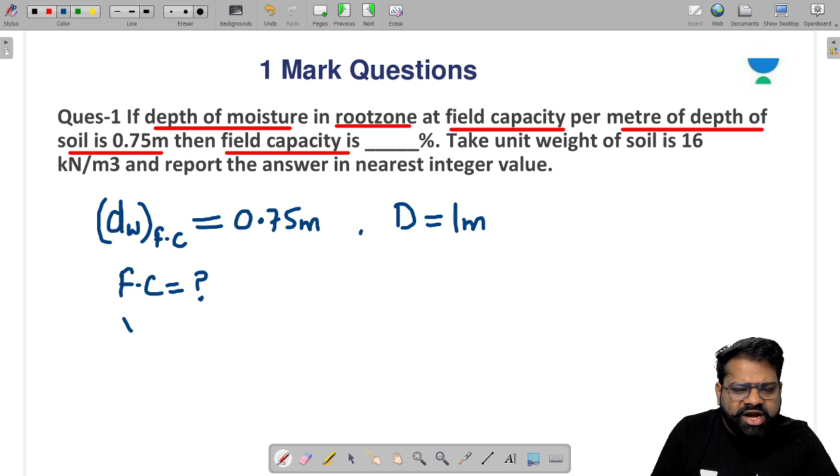If the unit weight of the soil, the dry unit weight of soil, is 16 kilonewton per meter cube, and you have to report the answer in the nearest integer value.

As we already know, the depth of water up to any point, either up to field capacity, permanent wilting point, or optimum moisture content, can be calculated by a simple formula. If we calculate the water available in the root zone up to field capacity, the formula will be gamma D divided by gamma W, multiplied by depth of root zone, and multiplied by the field capacity, since we want to find water up to field capacity.

You are given gamma D equal to 16 kilonewton per meter cube, depth of root zone is 1 meter, depth of water up to field capacity is 0.75 meter. For unit weight of water, since it is not given, you take 9.81 kilonewton per meter cube. All the values are given; only you need to find the field capacity.

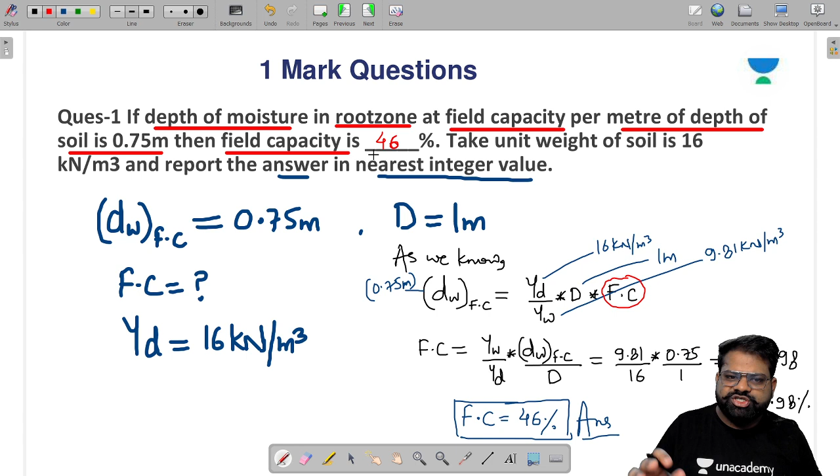Moving forward to the next question. This question is all about irrigation water. What does the question say, just read it. The question says...

The concentration of sodium, magnesium, and calcium in the irrigation water are 25, 2, and 3 milliequivalent per liter respectively. These concentrations are given in the question. If the electrical conductivity of the water is 300 micromho per centimeter at 25 degrees Celsius, then the irrigation water is classified as...

There are two things given: the first is the calcium, magnesium, sodium concentration, and the second is electrical conductivity. First, we classify the water based on sodium, magnesium, and calcium into low sodium water, high sodium water, or medium sodium water. To determine whether the water is high sodium, low sodium, or very high sodium, we calculate the sodium adsorption ratio.

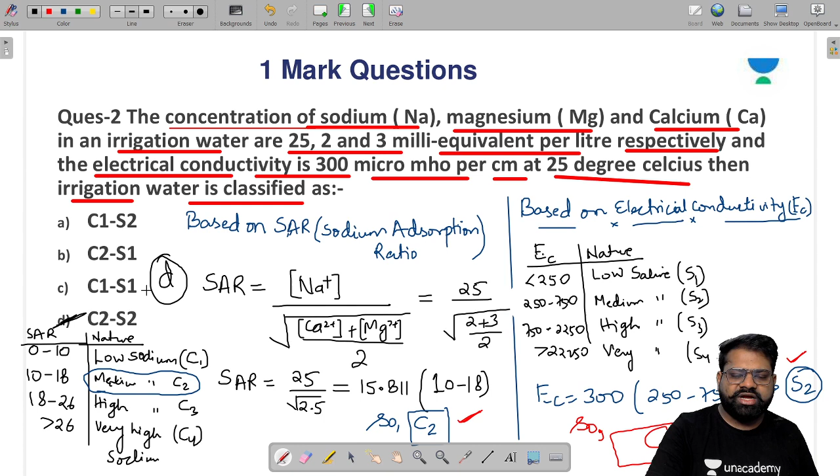Okay, this is the third question. Just read it and try to understand this question. It's an important question. You can solve it easily, but there are many students who can't solve it. After solving this question, you will get an idea that this type of question can also come in the GATE examination for 1 mark. So moving forward to this question, let's read it. What is this question trying to say?

Read it. The wetted area and wetted perimeter of a channel section are given. Wetted area is given as 6.25 meter square and wetted perimeter is 2.5 meter. If the average velocity of the water flowing is 1 meter per second, then find the mean size of the sediment carried by the channel.

He is asking about the mean size, meaning he is asking about D50. D50 is called mean size. You need to find it. As we know, when we study irrigation, the mean size can only come when we calculate the silt factor, that is F. This mean size can only be obtained when we calculate the silt factor F.

But this silt factor can only come into account when we are studying Lacey theory. It means that in this question, in order to find the mean size, you need to find the silt factor, and in order to find the silt factor, you need to use Lacey theory. You need to know how to use Lacey theory.

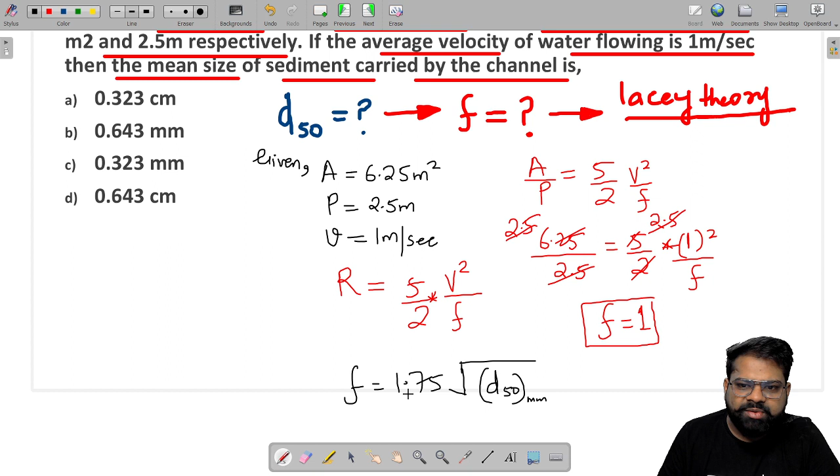Silt factor is equal to 1, and as we know that the silt factor is equal to 1.75 under root of mean size in mm. f is given as 1.

So here the mean size in mm is equal to 1 upon 1.75 ka whole square. When you solve this, the value comes out to be 0.323 mm. So option C is correct, because the mean size is given as 0.323 mm, which comes out to be 0.32 mm.

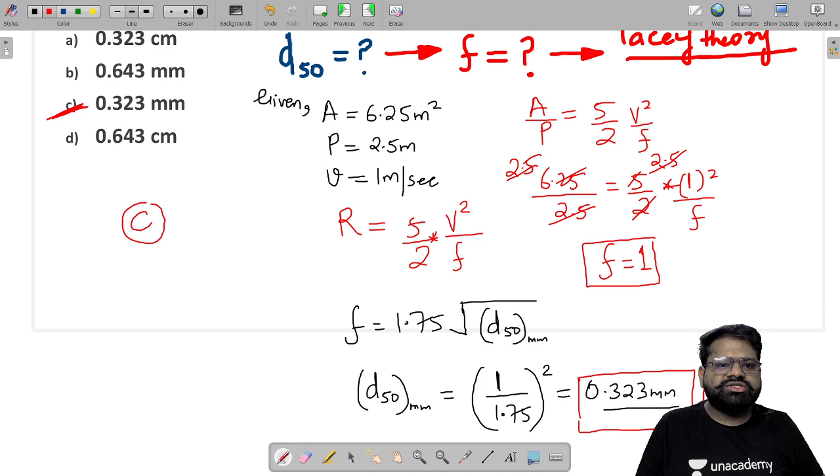The correct answer of this question would be C. I hope you understand. So these are the number of questions which we have discussed for the 1 mark.

Now we discuss what type of questions can come for 2 marks in irrigation engineering. This is the fourth question, which can come for 2 marks. Just read this question, my dear students.

Just read this question, my dear students. What he is trying to say, just try to understand what this question tries to say.

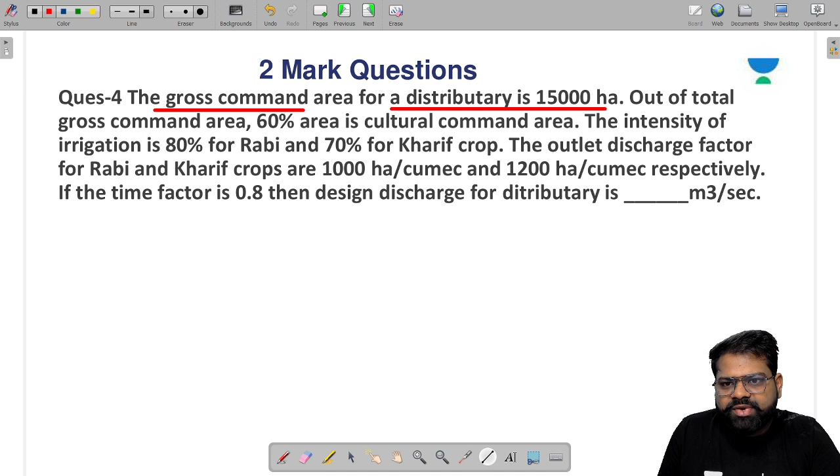So the gross command area for the distributary is 15,000 hectares. Out of total gross command area, only 60% area is cultivable command area. Means that out of 15,000 area, only 60% area is that area on which irrigation can be done.

That the land can be irrigated, but the intensity of irrigation is 80% for the Rabi season and 70% for Kharif season. Out of 60% of cultural command area, only 80% is used for irrigation in the Rabi season and 70% is used for irrigation in the Kharif season.

If the outlet discharge factor, what is the outlet discharge factor? It means the duty at the outlet point for the Rabi and Kharif crops are this and this respectively, and if the time factor is this, then the design discharge for the distributory is? How do you solve it? Just write it.

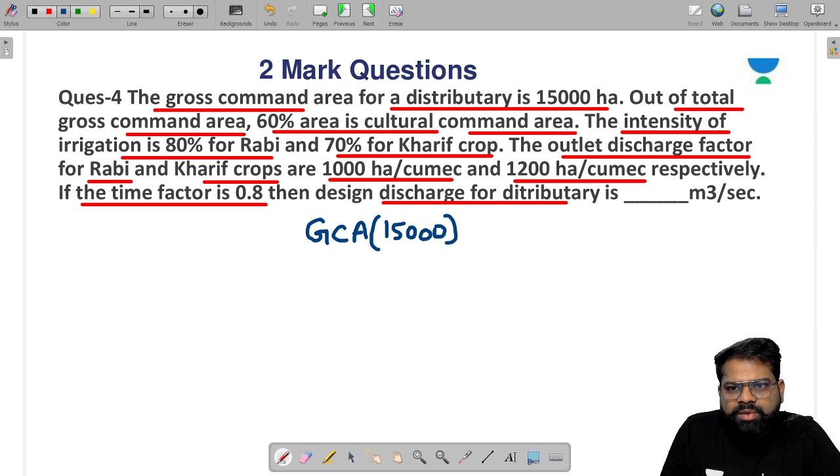As it is given, the gross command area is equal to 15,000 hectares. Out of these 15,000, if I talk about...

The cultural command area is only 60% of GCA, that is equal to 9,000 hectares. Out of these 9,000, what he is trying to say is only 80%...

is irrigated in the Rabi season. If I talk about the area irrigated in Rabi season, then 80% of CCA, that is 0.8 into 9,000, 8 9 is 72, that is equal to...

7,200 hectares. And the area which is irrigated in the Kharif season is equal to 70% of 9,000, 7 9 is 63, that is equal to 6,300 hectares.

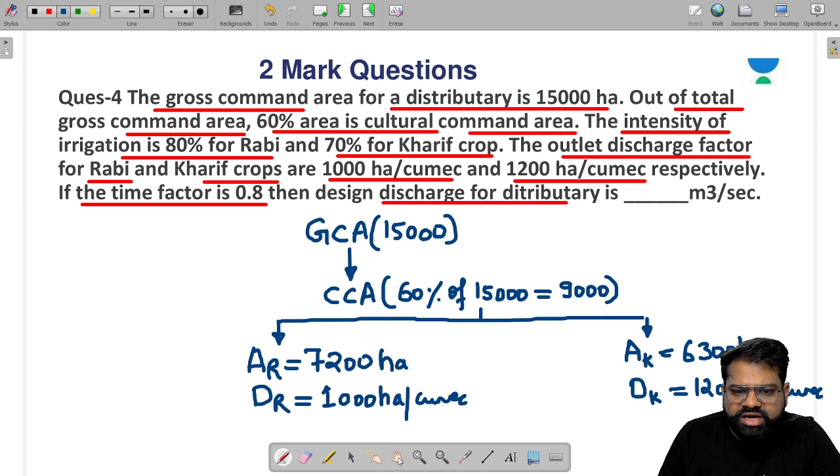If the duty of Rabi season is equal to 1,000 hectare per cumec, and if the duty of Kharif season is equal to 1,200 hectare per cumec, then he is trying to ask what is the design discharge capacity of the distributary.

So if I talk about the design discharge of the Rabi season, how do you calculate it? That would be equal to A divided by D, area which is irrigated in Rabi season, divided by duty of the Rabi season. But this will only be obtained when, for the whole irrigation period, the canal is running.

But the time factor is 0.8, it means that you have to divide with the time factor, you have to determine it with the time factor.

Similarly, you calculate the design discharge for Kharif season. So for Kharif season, the design discharge will be equal to area irrigated in Kharif season divided by duty of the Kharif season, multiplied by 1 upon time factor.

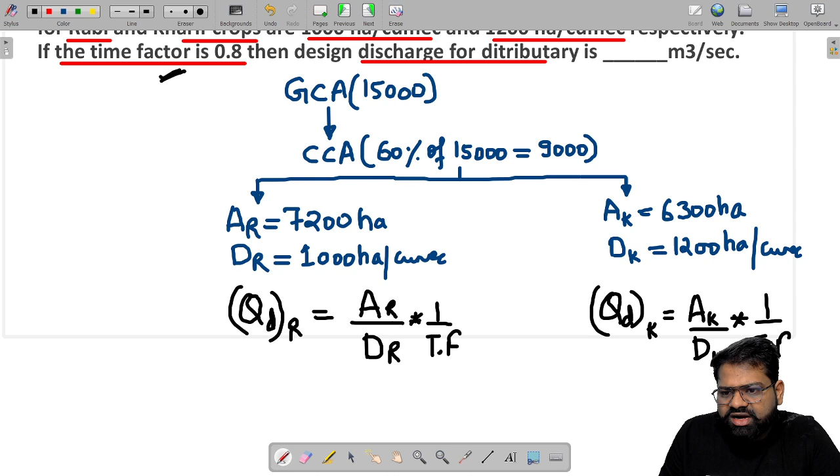Moving forward, design discharge for the Rabi season would be equal to area 7,200 divided by duty 1,000, divided by time factor 0.8. On solving this, the design discharge required for the Rabi season comes out to be 9 cubic meters per second.

And similarly, the design discharge required for the Kharif season would be equal to 6,300 hectare divided by 1,200 hectare per cumec, multiplied by 1 upon 0.8. On solving this, the design discharge for the Kharif season would come out to be... just solve it and tell me the answer.

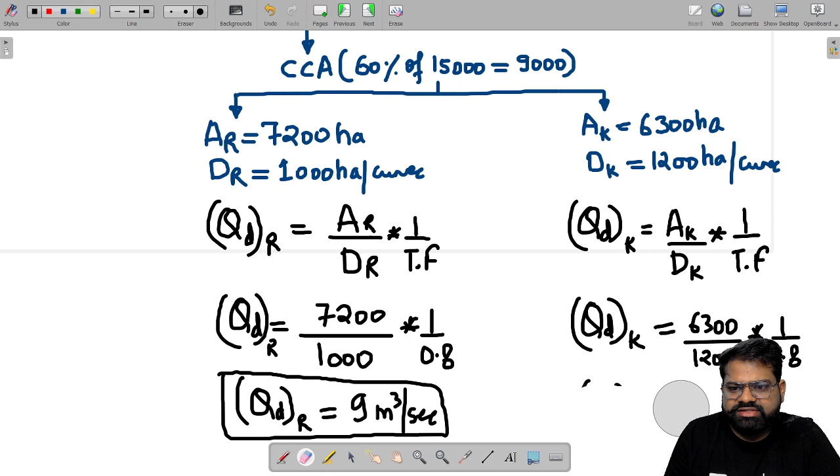Just solve it, my dear students. 6,300 divided by 1,200 and divided by 0.80, and it comes out to be 6.5625. So the design discharge for the Kharif season is coming out to be 6.5625 meter cube per second.

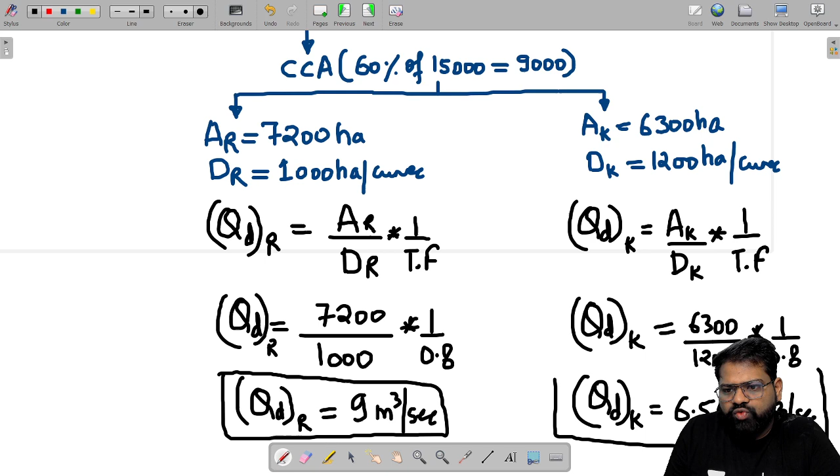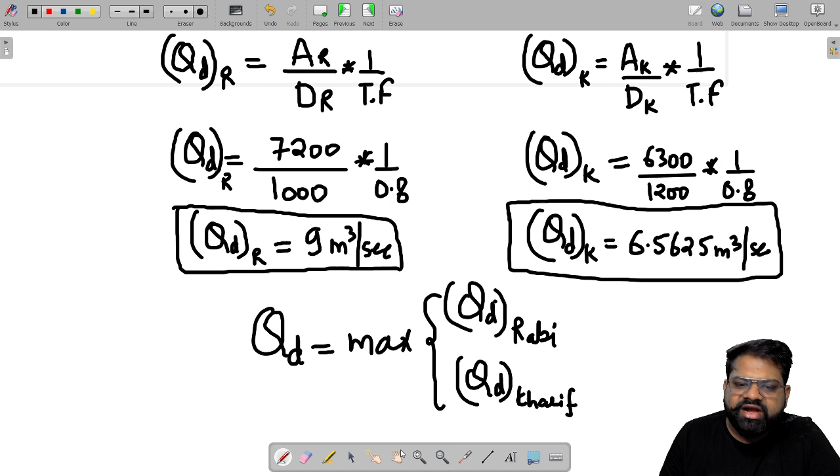Now, Kharif season and Rabi season are different seasons, not the same. The crops are grown at different times. So for the design discharge, we take the maximum of the design discharge required in the Rabi season or the Kharif season. This approach is used when the crops are of different seasons; if they were of the same season, we would add them up. But since they are different, we calculate using the maximum theory, and it comes out to be 9 meter cube per second.

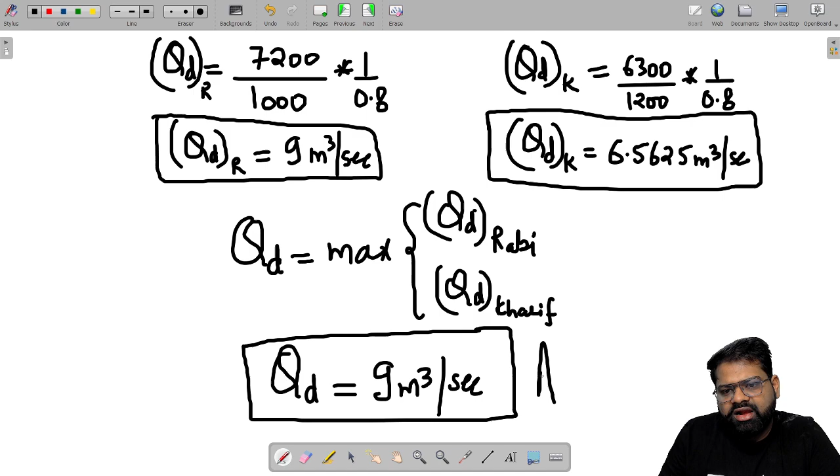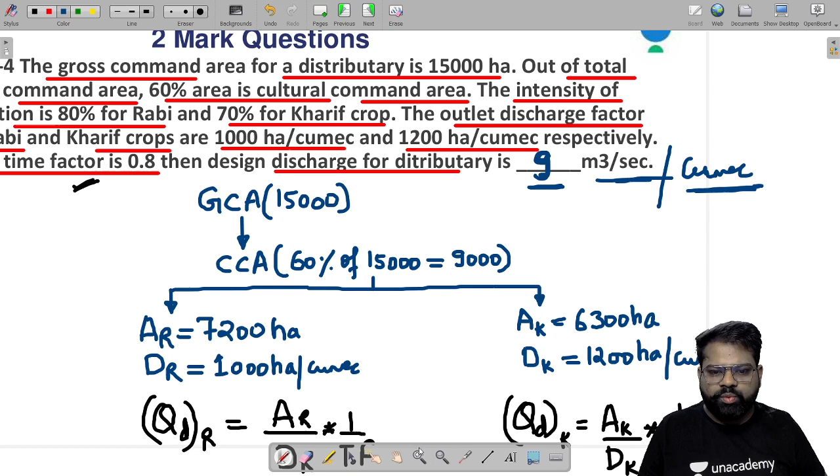So the design discharge of the distributary or the canal comes out to be 9 meter cube per second. Since this is a numerical answer type question, you have to substitute the value 9 here, because the answer is calculated in meter cube per second, and 1 meter cube per second is also called 1 cumec. I hope you understand this concept and this question in a very nice way.

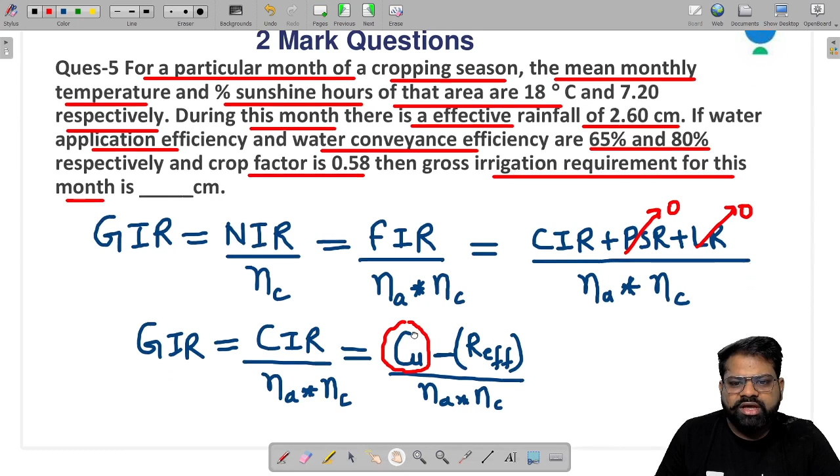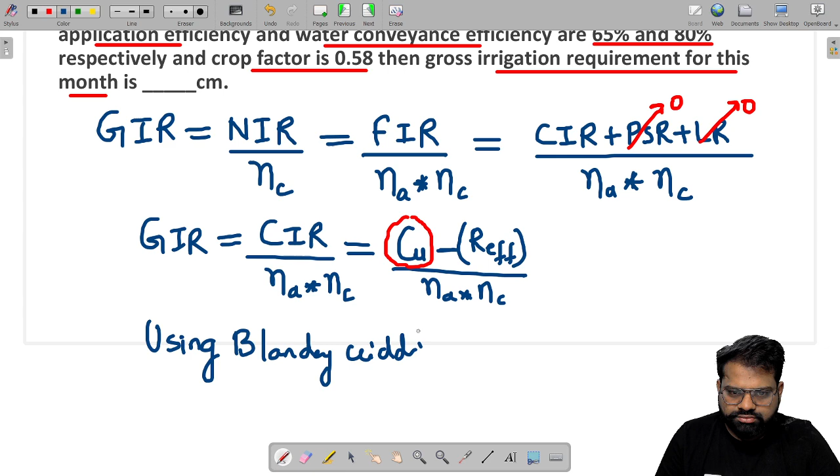Since percentage sunshine hours are given, on the basis of percentage sunshine hours, using the Blaney-Criddle equation, you can find the consumptive use as: consumptive use equals 2.54 times K multiplied by P (percentage sunshine hours) multiplied by TF, divided by 100.

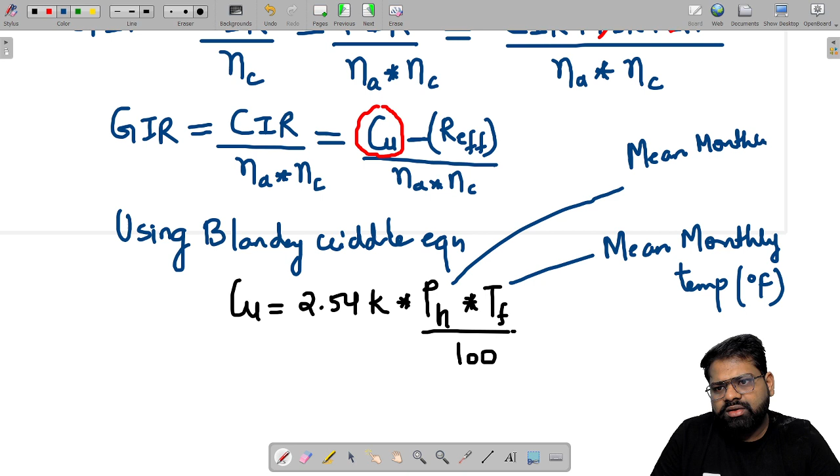What do you mean by TF? TF is the mean monthly temperature. If you have studied this formula, TF is the mean monthly temperature in degree Fahrenheit - you have to write the temperature in degree Fahrenheit. What is P? P is called the mean monthly percentage of sunshine hours.

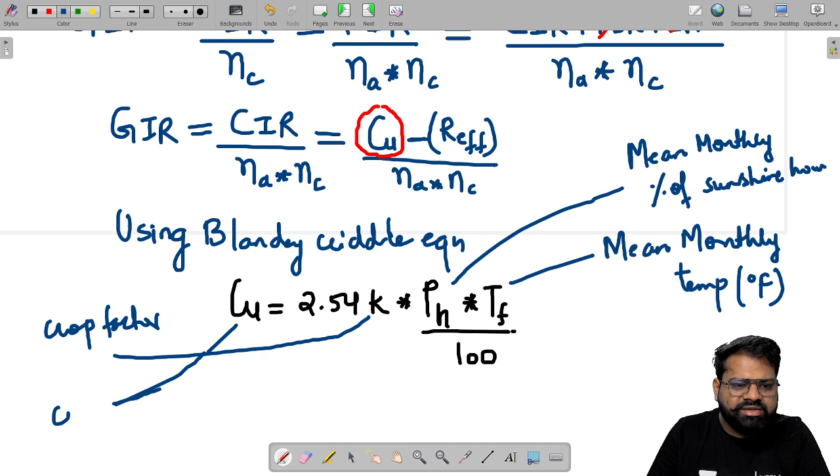The amount of sun which gives the sunshine in the whole year, what is the percentage in that month in which the crop is sown? So mean monthly percentage of sunshine hours. K is called as crop factor. Based upon this data, CU can be calculated. CU is called as consumptive use, and its value will come out to be in centimeters.

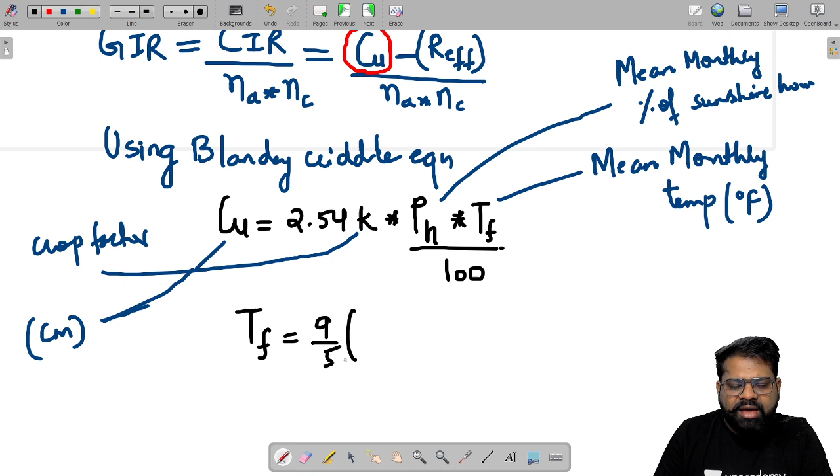If we want to find the value of TF, then TF is equal to 9 by 5 times temperature in degree Celsius. The temperature in degree Celsius is given as 18 degrees Celsius plus 32. When you solve this, the mean monthly temperature in degree Fahrenheit comes out to be 64.4 degree Fahrenheit.

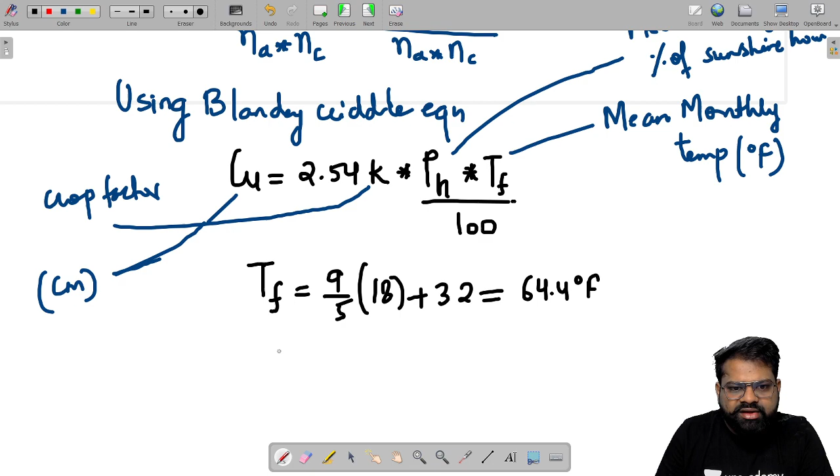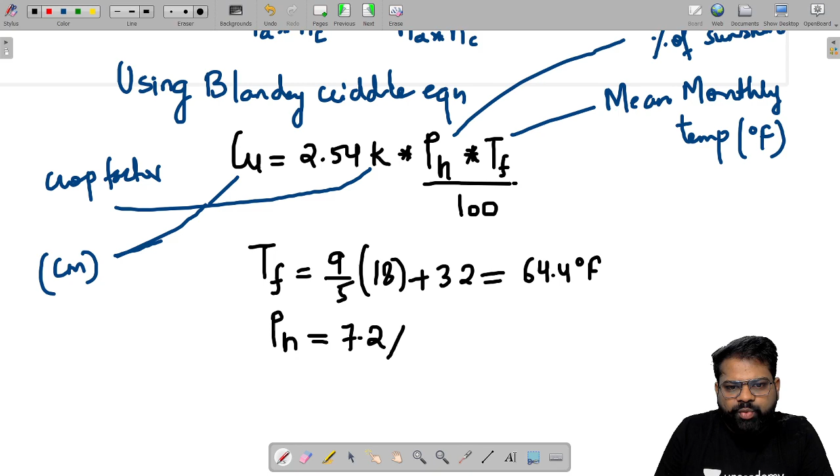Mean monthly percentage of sunshine hours is given as 7.2%. The crop factor is given as 0.58.

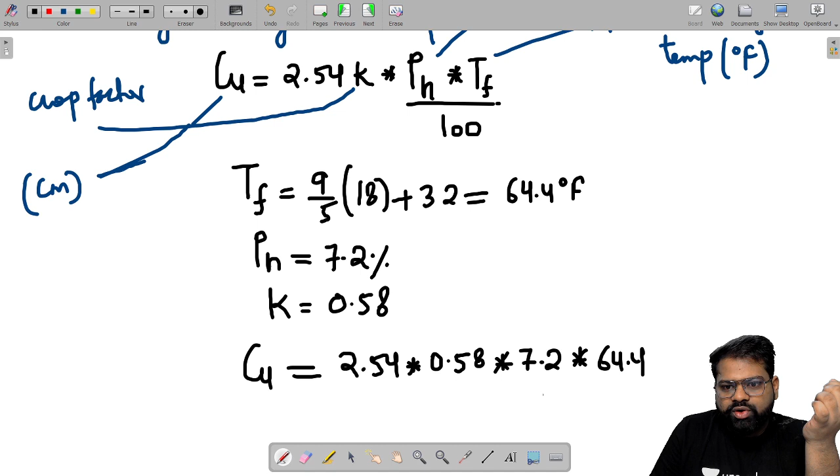Substituting this value in the above equation, the consumptive use is equal to 2.54 multiplied by crop factor 0.58 multiplied by mean monthly percentage of sunshine hours 7.2 multiplied by TF 64.4, divided by 100. On solving this, the consumptive use comes out to be 6.83 centimeter.

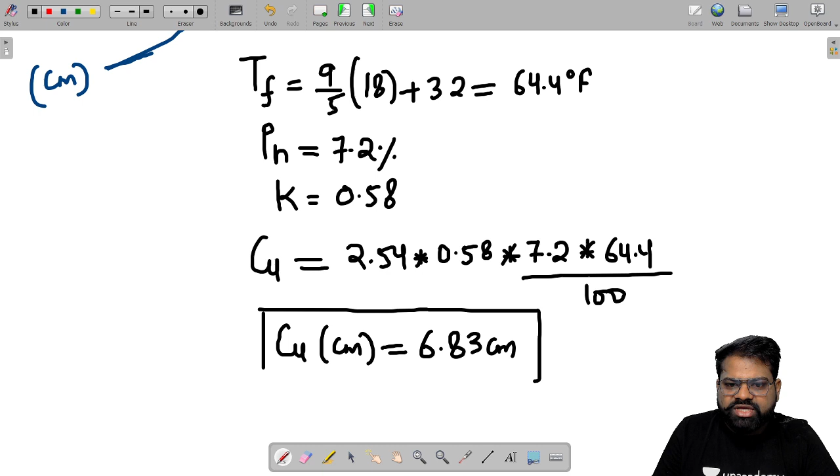If we calculate the consumptive irrigation requirement, CIR will be equal to consumptive use minus effective rainfall, which is given as 2.6. The consumptive irrigation requirement comes out to be 4.23 centimeters.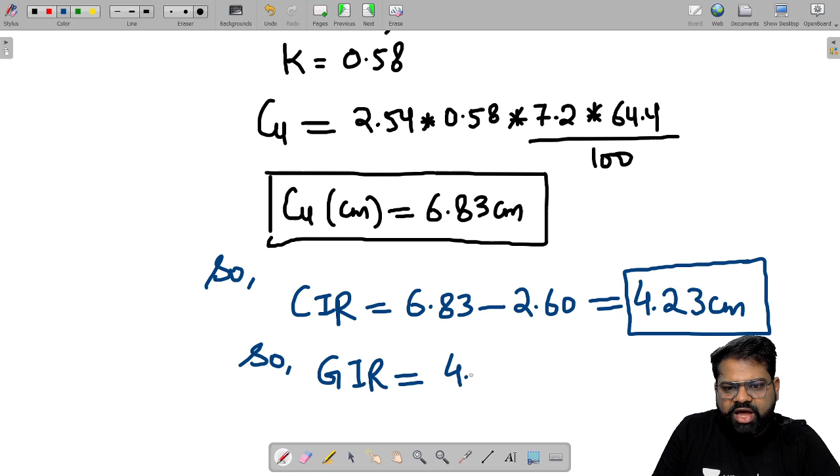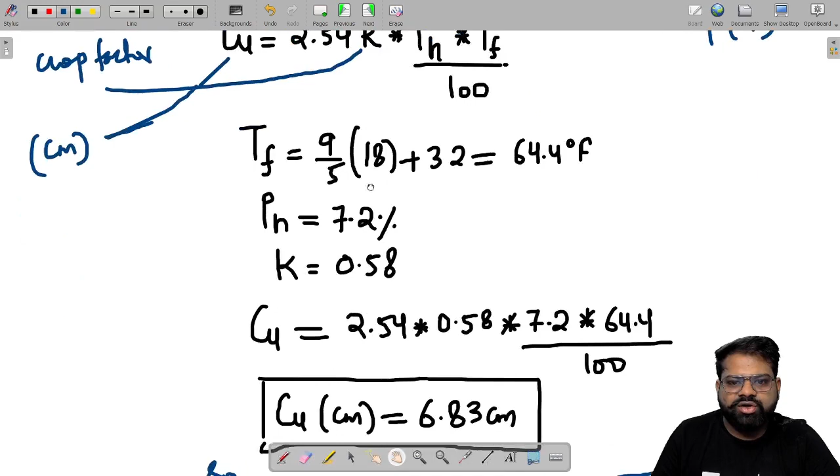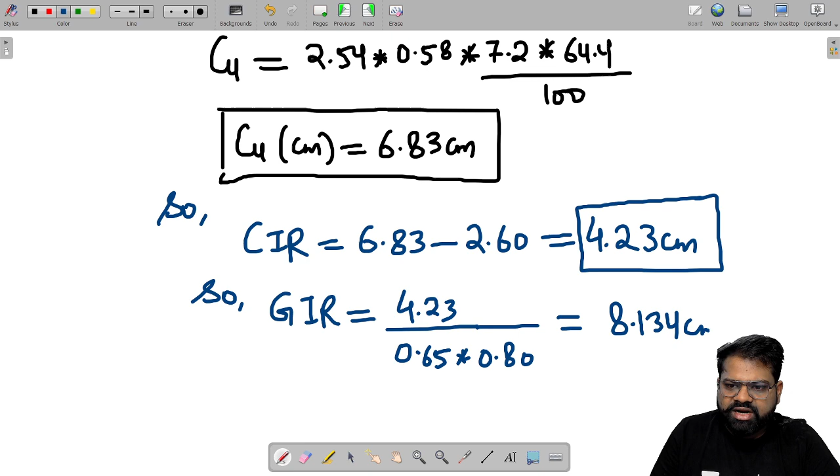The gross irrigation requirement would be equal to consumptive irrigation requirement 4.23 divided by application efficiency times conveyance efficiency. Water application efficiency is 65% and conveyance efficiency is 80%. So this value comes out to be 0.65 multiplied by 0.80. The gross irrigation requirement comes out to be 8.134 centimeter.

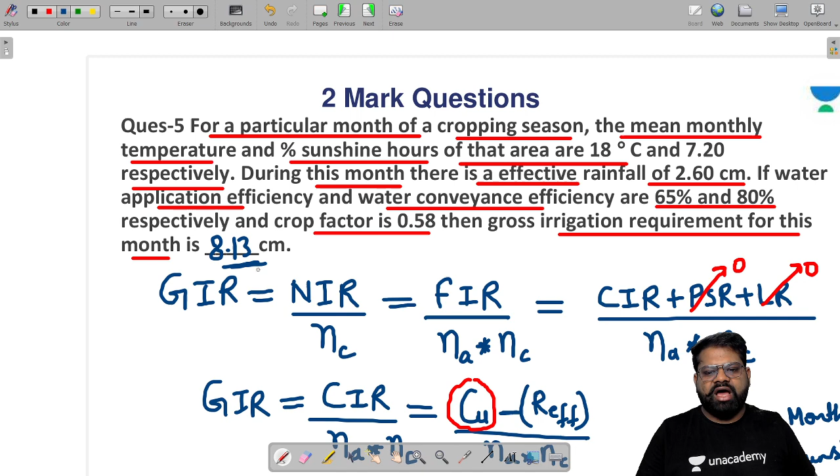Since this is a numerical answer type question, you have to put the answer as 8.13. That is the right answer of this question. I hope you understand this question. The right answer of this question is 8.13 centimeter.

Moving forward to the sixth question. This is the sixth question. Try to solve this question, my dear students.

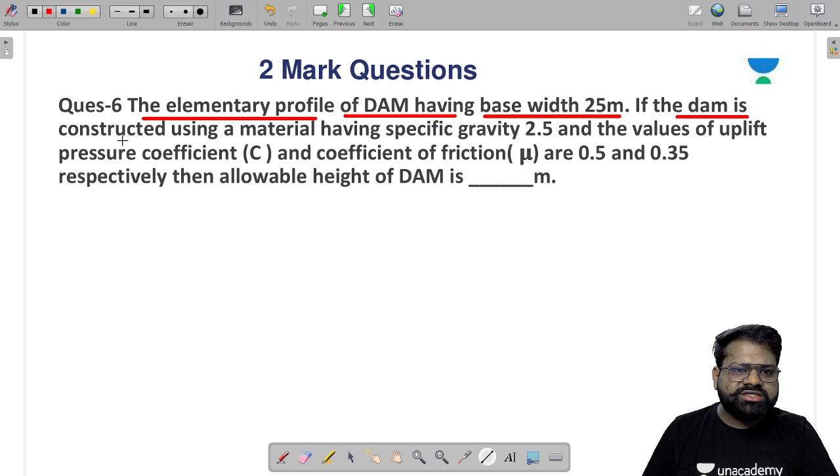Okay, my dear student, just read this question, what it is trying to say. The elementary profile of a dam has a base width of 25 meters. If the dam is constructed using a material having a given specific gravity, and the values of uplift pressure coefficient C and coefficient of friction mu are 0.5 and 0.35 respectively, then find the allowable height of the dam.

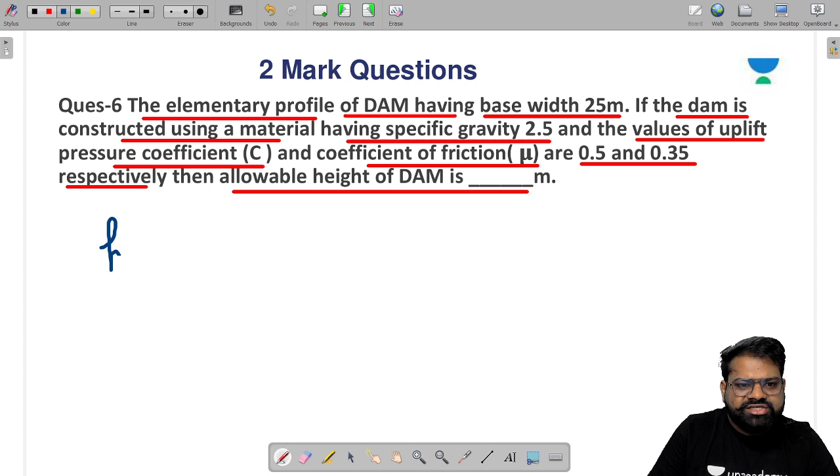You have to calculate the allowable height, H allowable. This allowable height is calculated on the basis of the minimum of the height calculated based on tension failure and based on sliding failure. There are two criteria on the basis of which the allowable height is calculated: one is tension failure and the other is sliding failure. The allowable height is the minimum of the values based on tension failure and sliding failure.

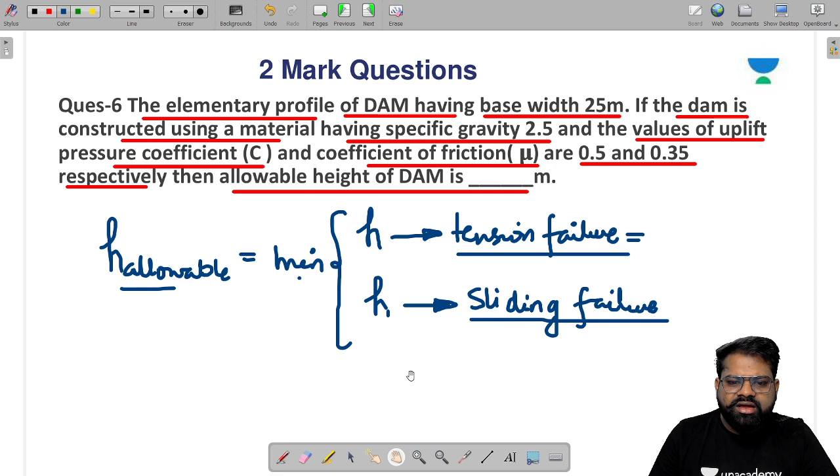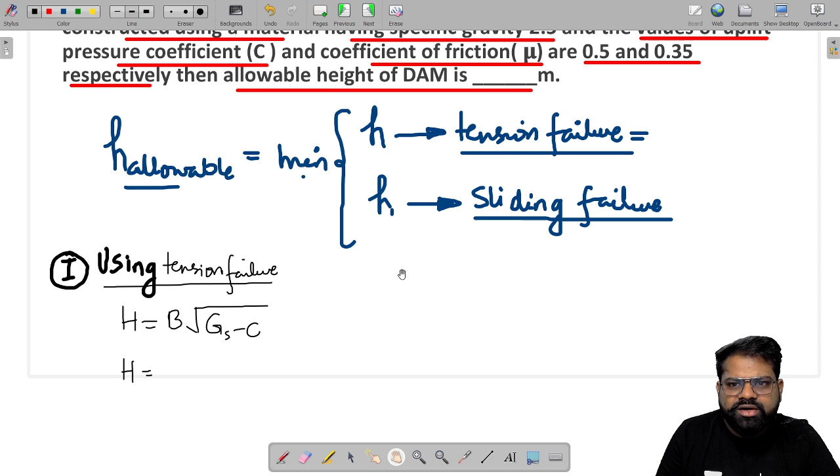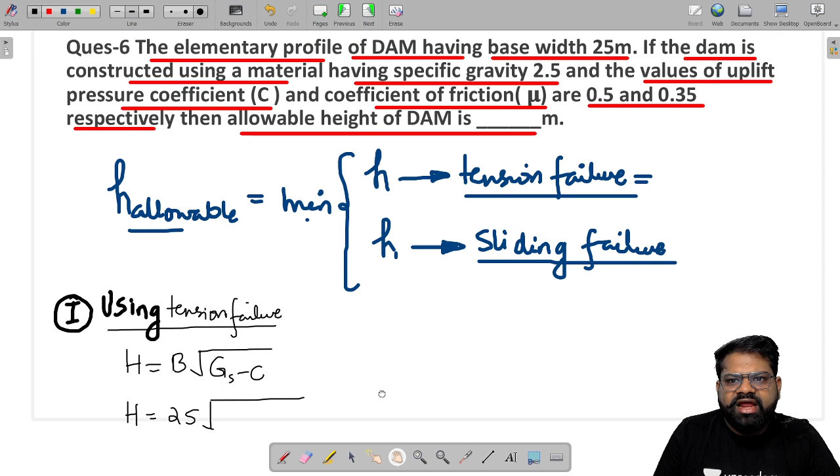We will calculate in the below section. If we talk about using tension failure, as we know, on the basis of tension failure, the allowable height h is equal to b under root of gs minus c. Base width is equal to 25, multiplied by gs which is given as 2.5, minus c which is given as 0.5. On the basis of this, allowable height is coming out to be 35.5 meter.

Now we'll use the second criteria, that is using sliding failure criteria.

If we talk about the sliding failure criteria, h is equal to mu into b times of gs minus c. On the basis of sliding failure criteria, height of the dam h is equal to mu into b, where mu is the coefficient of friction.

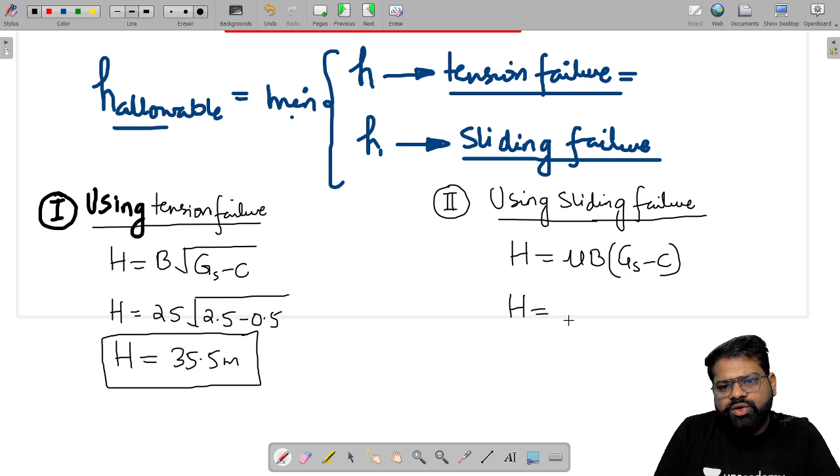Mu is given as 0.35, width of the dam is 25, Gs is 2.5 and C is 0.5. On solving this, H comes out to be 17.5 meter.

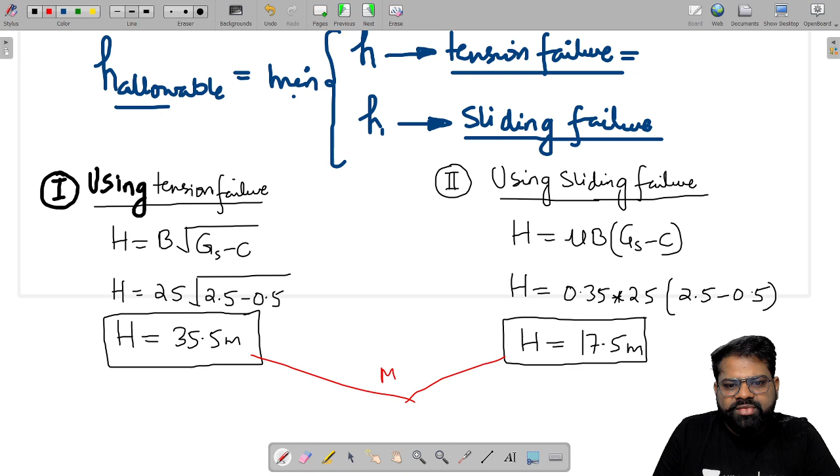So on the basis of this, you have to take the minimum value. As you know, the allowable height is basically the minimum of these two values. The allowable height of the dam which can be allowed to construct based upon the above data is 17.5 meter.

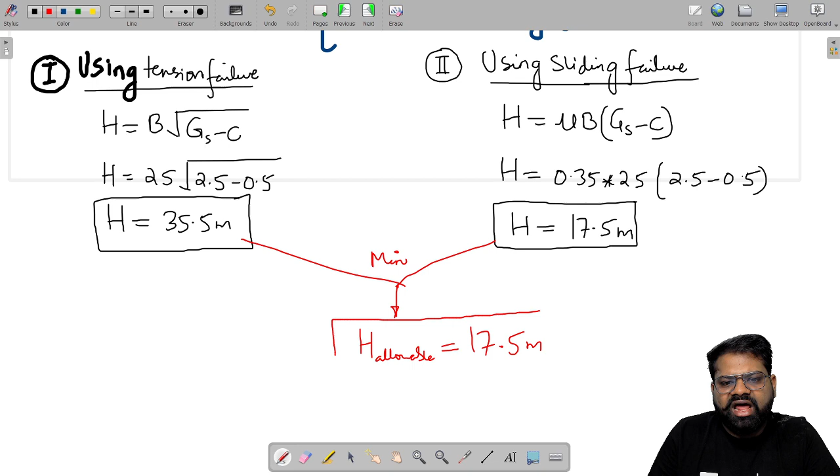The correct answer of this question is 17.5 meter. Just write this answer in numerical answer type - it is 17.5 meter. Hope you understand this question.

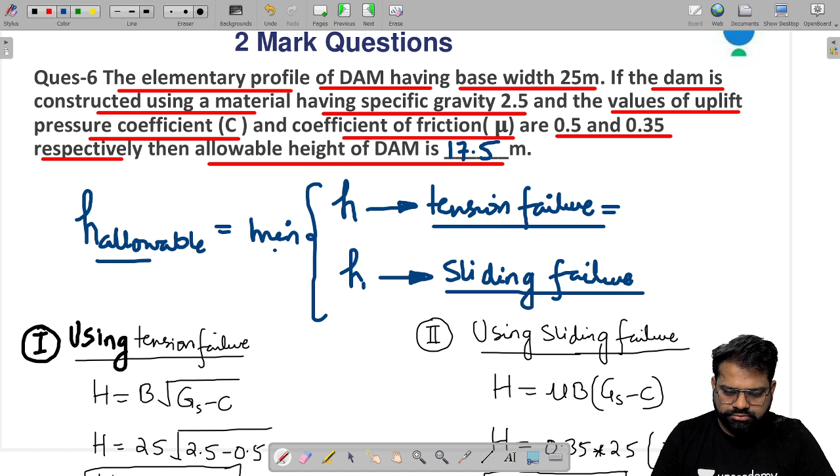Okay, moving towards the seventh question. This is the seventh question which is coming from a lined irrigation canal system. Such type of question can come in 2 marks. Just read this question, my dear students. It's also a very easy question.

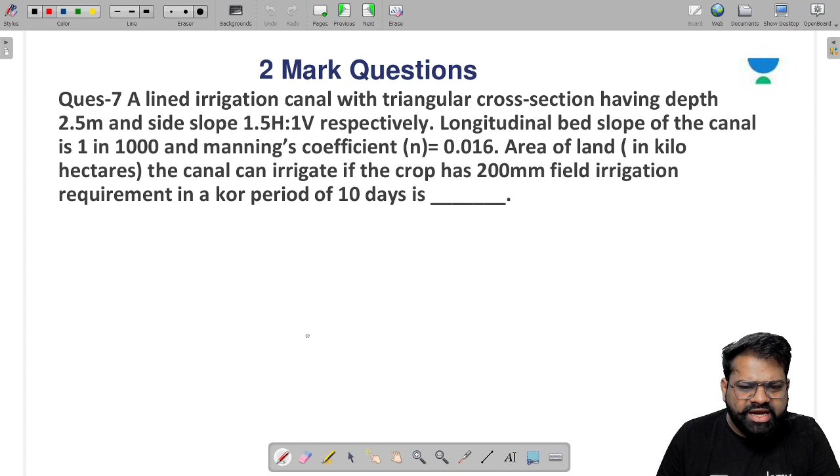A lined irrigation canal with a triangular cross section having a depth of 2.5 meter and having a side slope of 1.5 meter horizontal and 1 vertical respectively. The longitudinal slope of the canal is 1 in 1000 and the Manning's coefficient is given. You need to find the area of land in kilohectares that the canal can irrigate if the crop has a 200 mm field irrigation requirement, meaning the depth of water required on the land is this, and the kor period is 10 days.

So the lined canal system - as the question says, this is a lined canal system. As we know, we make the corners of a lined canal section as circular. Why? Because in order to avoid silting, we make the corners of a lined cross section circular. So when we do this, this becomes basically a triangular section.

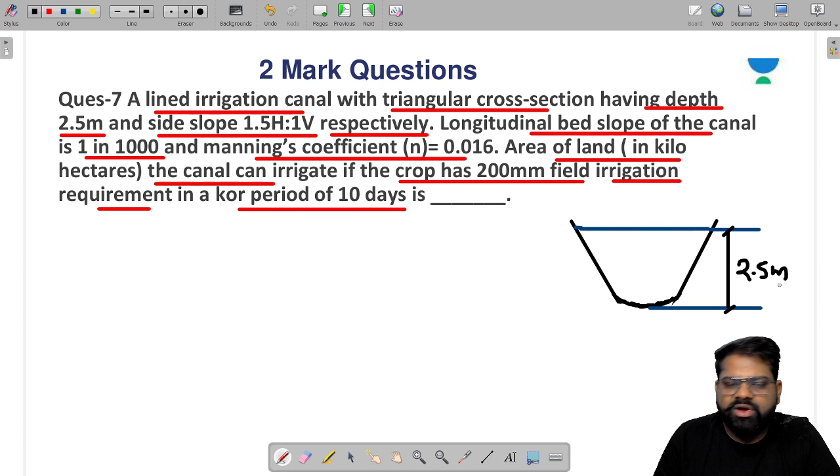Triangular lined section in which the depth of water flowing in this channel is given as 2.5 meter. The side slope is 1 vertical is to 1.5 horizontal.

Suppose this is theta. If we want to calculate the wetted area, the area comes out to be y square into theta plus cot theta. If we calculate tan theta, so if this is theta, this is also theta. Tan theta is equal to 1 upon 1.5, so cot theta comes out to be 1.5.

So if we calculate theta, theta comes out to be 33.69 degree, but you have to put it into radian. So we multiply by 3.14 and divide by 180, and it comes out to be 0.587.

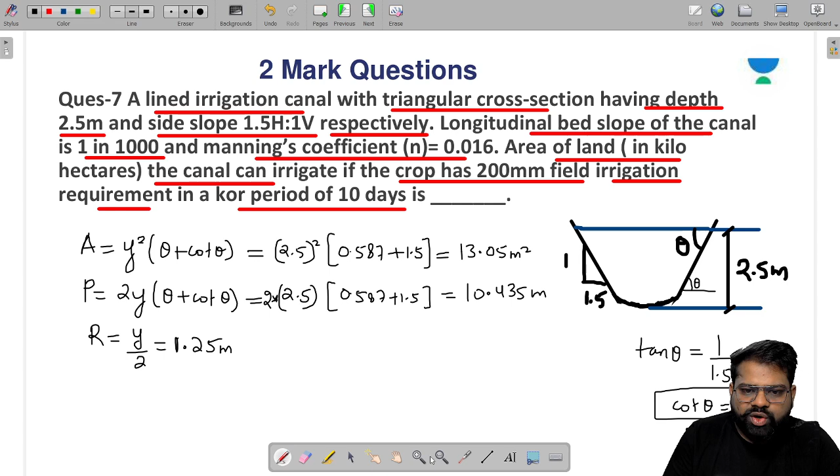So now area is calculated. The hydraulic radius will be equal to y upon 2 - that is equal to, for the lined triangular section, r is equal to this. Now as this is a lined cross section, we can use Manning's equation. As it is a lined channel, what you write...

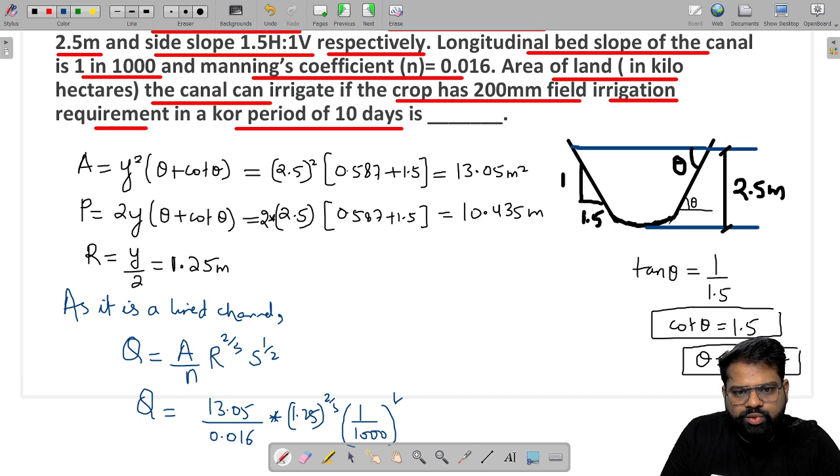On solving this, the discharge which comes out to be, you calculate it, comes out to be 29.93 meter cube per second. Discharge comes out to be this.

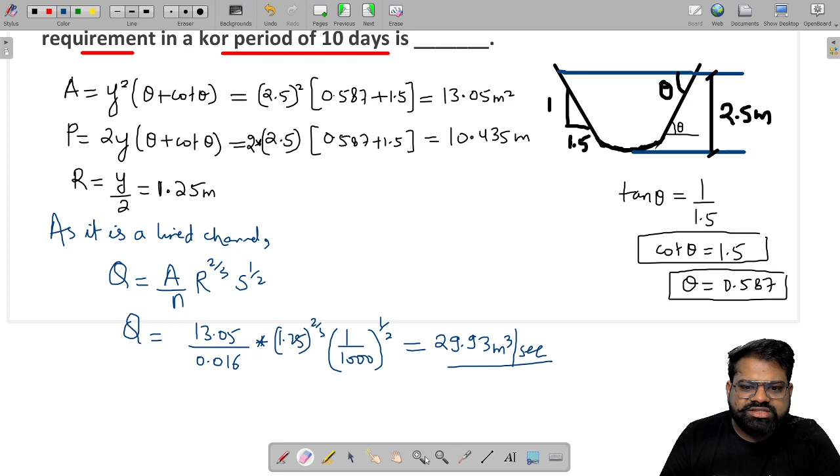So if the discharge of the canal is this, and the canal is running because the kor period is 10 days, the canal has to be run for 10 days. So the volume of water supplied will be equal to Q is equal to V upon T. So the volume of water is equal to Q multiplied by T.

It is 29.93 multiplied by T, that is 10 days. 1 day is equal to 86400 seconds. So the answer would come out to be in meter cube.

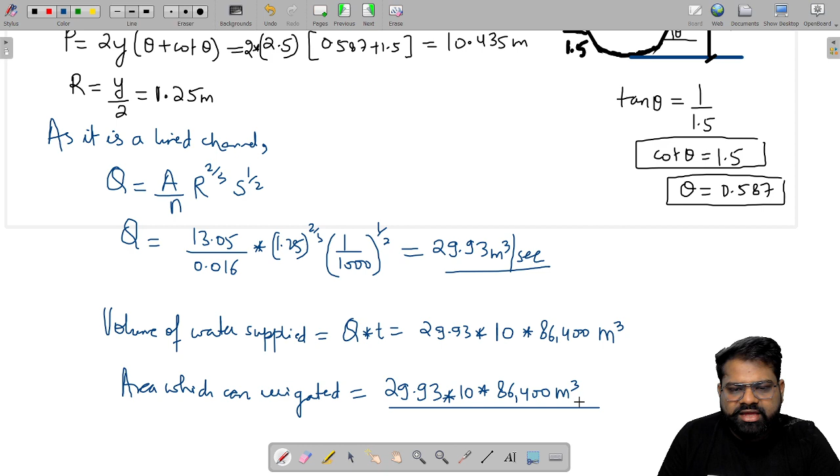So the area which can be irrigated would be equal to volume divided by depth of water required. Volume is equal to 29.93 multiplied by 10 multiplied by 86400 meter cube, divided by the depth of water required, which is given as 0.2 meter, that is 200 mm.

So as this value will come out to be in meter square, the value comes out to be 29.93 multiplied by 10 multiplied by 86400 divided by 0.2, in meter square. But you need to find the value in hectares, so just divide this whole value by 10 to the power 4, so this value will come out to be in hectares.

Just solve this value: 29.93 multiplied by 10 multiplied by 86400 divided by 0.2, divided by 10 to the power 4. Now you need to find the value in kilo hectares, so divide by 1000 more. So the value would come out to be 12.93 kilo hectares.

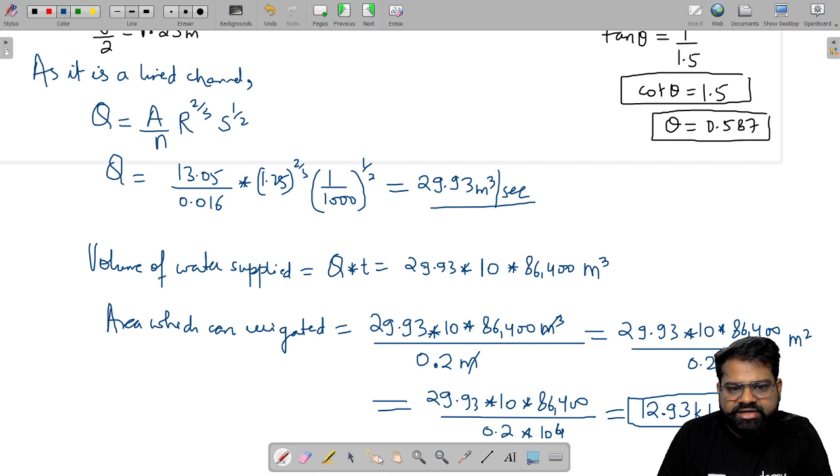So the answer that comes out to be 12.93, because they are asking for the area of land which can be irrigated in kilo hectares. So the right answer of question number 7 is 12.93 kilo hectares. I hope you understand this question, which had come from the lined irrigation canal topic.

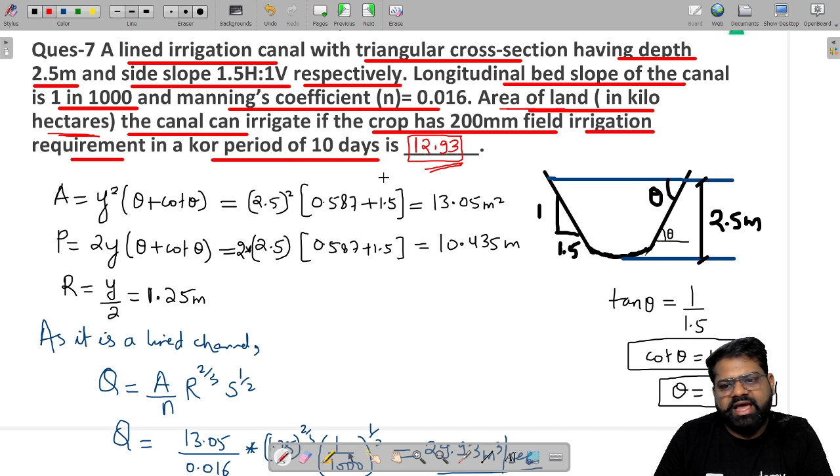So moving forward to the eighth, or the last, question. Just read this question, my dear students.

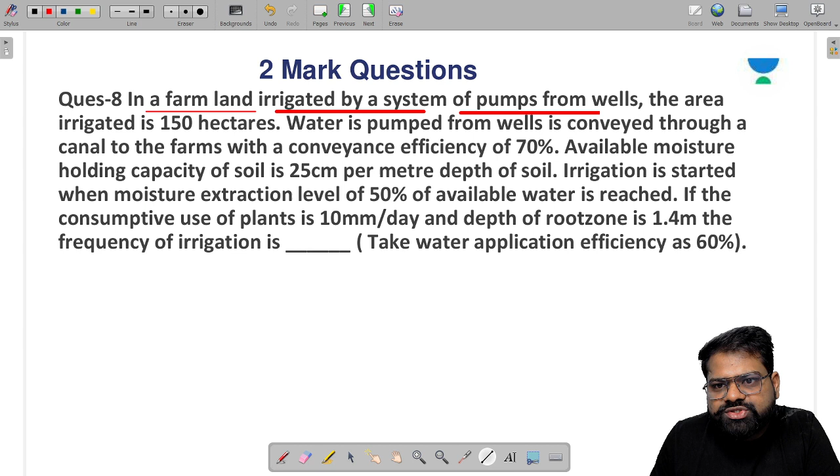Just read it, what he's trying to ask. This is a very good question, and such type of question can come in the GATE 2021 exam. In a farmland which is irrigated by a system of pumps from the wells, the area irrigated is 150 hectares. You need to irrigate an area of 150 hectares. Water is pumped from the well and is conveyed through a canal to the farms with a conveyance efficiency of 70%.

The available moisture holding capacity of the soil is 25 centimeter per meter depth of the soil. Irrigation is started when the moisture extraction level is 50% of the available water which is stored. If the consumptive use of the crop is 10 mm per day, the depth of root zone is 1.4 meter, then find the frequency of irrigation, if the water application efficiency is 60%.

So what he is trying to say is that you need to find the frequency of irrigation. What is given, just write the given data, because if you are able to write the given data, the question becomes easy. Farmland: you need to irrigate an area of 150 hectares. The water conveyance efficiency is given.

He is saying the available moisture holding capacity, the water which is available in the root zone, is 25 centimeter per meter.

So it means if the root zone is of 1 meter, then the water available per meter of root zone is 25 centimeters. The irrigation is done when the moisture extraction is 50% of available moisture. The consumptive use CU is equal to 10 mm per day, meaning 10 mm of water is lost due to consumptive requirements.

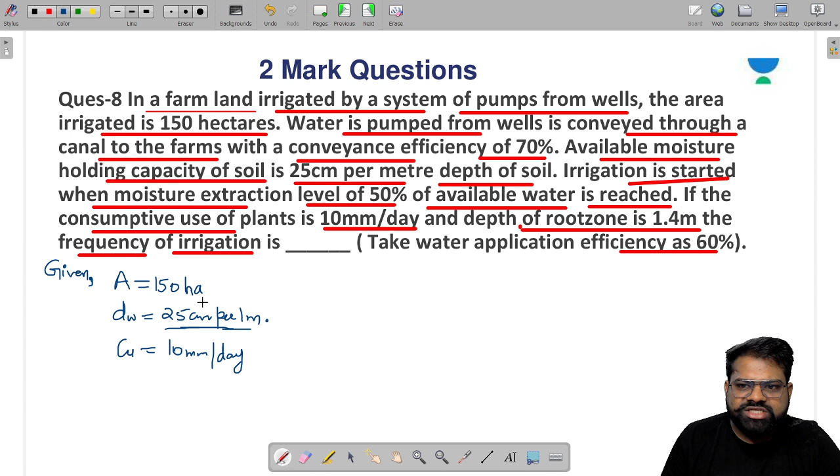Now the depth of root zone is given as 1.4 meter. If I ask about the depth of water available in root zone, for every 1 meter, the water available in root zone is 25 centimeter. So in 1.4 meter, the water available is 1.4 multiplied by 25. When you multiply this, the depth of water available in the root zone comes out to be 35 centimeter.

Now, irrigation is done when this depth of water available reaches 50%. So if I talk about the maximum allowable deficit, how much water is allowed to fall before irrigation, that is 50% of 35, which comes out to be 17.5 centimeter.

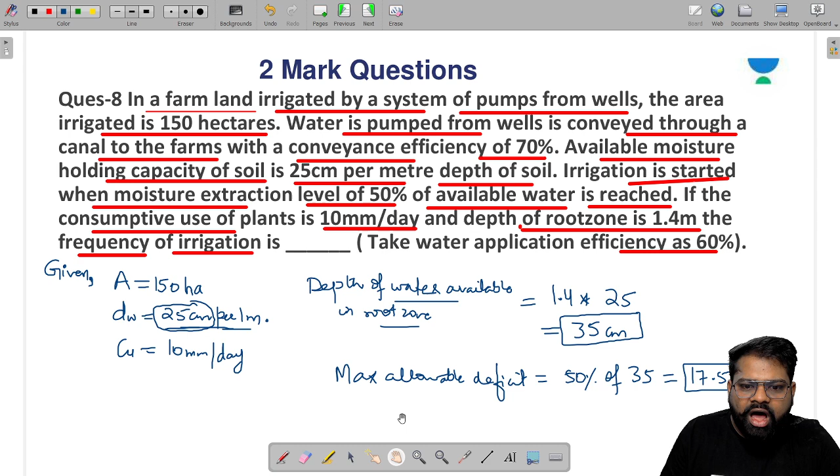Now the frequency of irrigation is equal to maximum allowable deficit divided by consumptive use. Maximum allowable deficit is 17.5 centimeter and consumptive use is 10 mm per day. Let me check if this is the right data. Yes, the data is correct: maximum allowable deficit is 17.5 and consumptive use is 10 mm per day.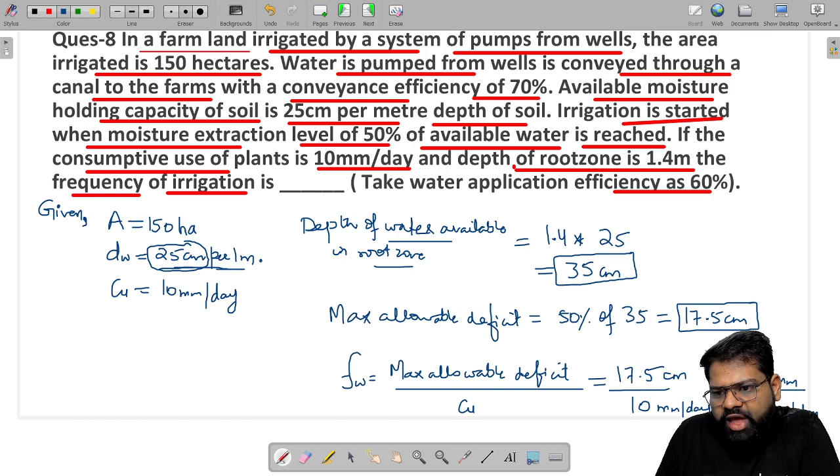If you convert it, that would be equal to 175 mm divided by 10 mm per day. So mm will be cancelled out by mm, then the frequency of irrigation would come out to be 17.5 days.

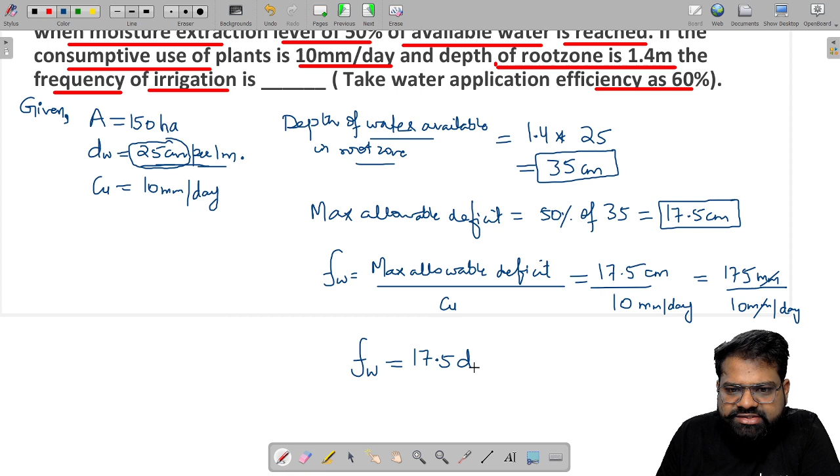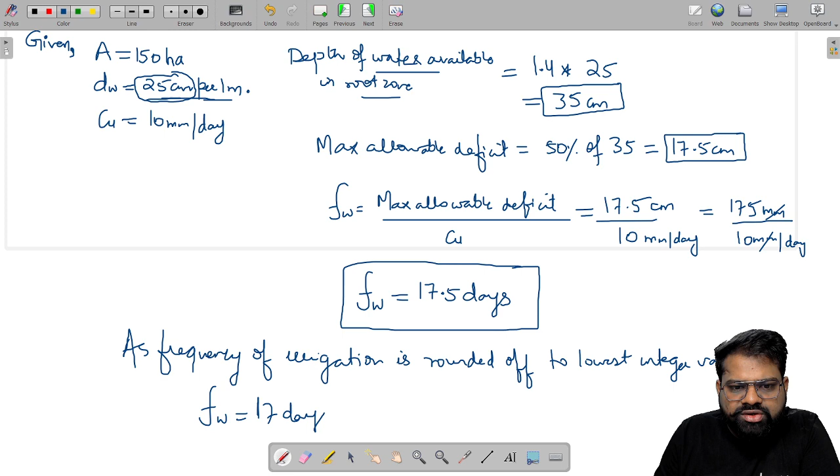As the frequency of irrigation is always rounded off to the lowest integer value, you have to remember this rule. So the frequency of irrigation would be equal to 17 days. The right answer of this question would be 17 days.

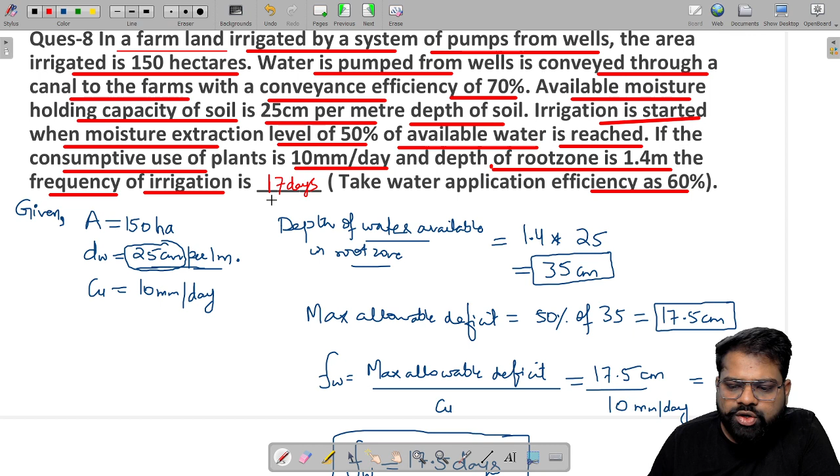I hope you understand. So we have discussed 8 questions which can come in the GATE examination. Just revise these concepts, because in GATE examination such types of questions are usually asked.